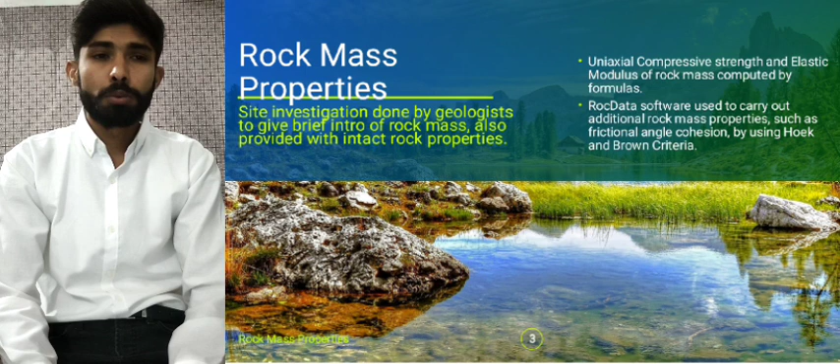which used the Hoek and Brown criterion to carry out additional parameters that are required for open pit mines, and hydrogeological consideration, rock support system, reinforcement, and most importantly the design of the pit wall and monitoring system. We selected the most suitable methods to classify our rock mass, that is rock quality designation and rock mass rating.

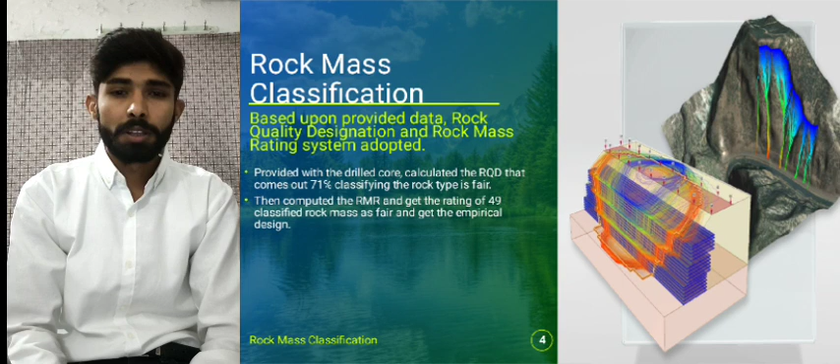We computed the RQD from the given core log, that is 71%, and the rock mass falls in the fair criteria. We also computed the RMR based upon the given information. Rock mass rating is 49, fair rock, falling in the third class, and we get the empirical design as suggested by the RMR table: excavation method, stand-up time and support system. Surface mine design.

The process of planning and designing the layout of infrastructure of an open pit mine is referred to as surface mine design. The basic aim of designing a surface mine is to maximize the ore recovery with minimum per ton cost of the ore body. This includes designing of an open pit, haul roads, surface plants, mineral processing plants, dump area, water storage, offices, etc.

So first of all, we have to decide our pit limits, that is totally based upon rock mechanics. The pit limit should be vertically and laterally decided. The general criterion to decide the pit limit of an open pit mine is based upon the economic factor, that is called the economic block value for a block that we have to mine.

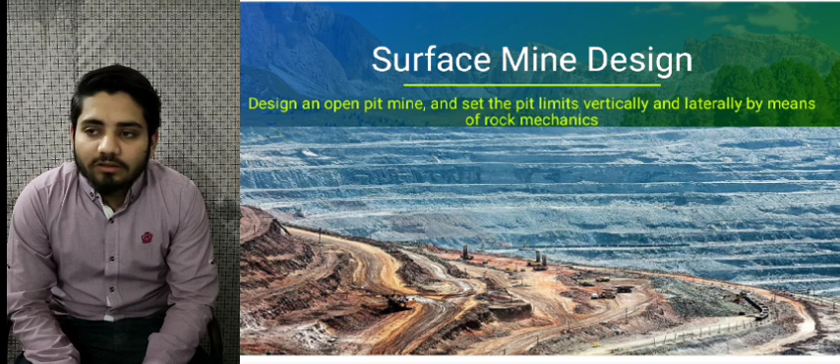As we were not given the economic block values for our blocks, nor the block size, we are not in a position to calculate the TBVs and CBVs of the blocks. So we have not decided our pit limit based upon the economic factor. We decided the pit limits based upon rock mechanics factors. For that, we searched literature formulas and decided to first calculate the stripping ratio of the ore body.

For the stripping ratio, we calculated the volume of the ore body and the volume of the overburden, and our stripping ratio became 0.34. Then, using the stripping ratio, the ore body thickness and the overburden thickness, we get the vertical limit of our open pit mine. For the lateral limit, we have to compute the slope angle, which we computed by the simplified Bishop's method, and our slope angle is 56 degrees.

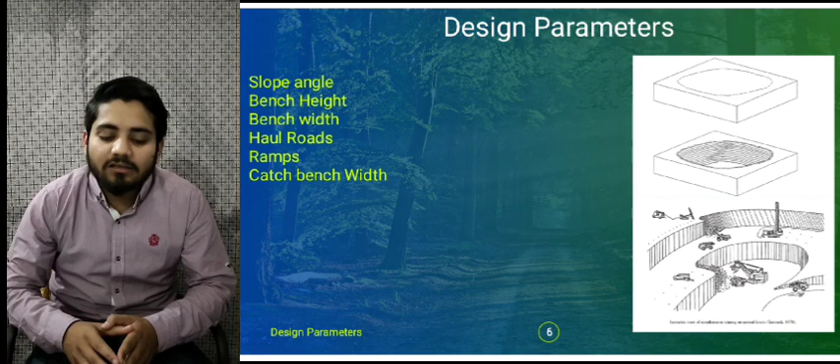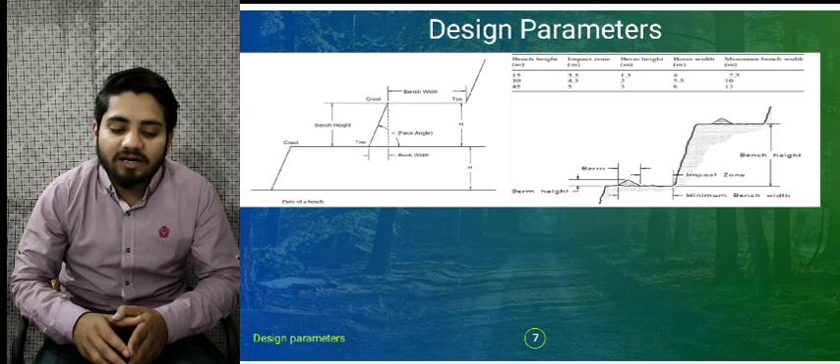In this slide, we are given the parts of the bench that are mostly used in the design of a bench. The bench comprises the bench angle, bench height, berm width, and catch bench width. And if we look at the table, it shows the typical values for bench height, bench width and catch bench width.

Further, we were asked to run a ground control assessment for finding the problematic areas, recommendations, and the selection of the location of the ramp. For running the ground control assessment, we were given the joint set data.

We put all the data in the Dips software and plotted the equatorial plot and contour plot of the stereonet. The stereonet shows us that the failure to be suspected is wedge failure. So we have to provide proper reinforcement and a proper support system to the benches, so that no wedge failure

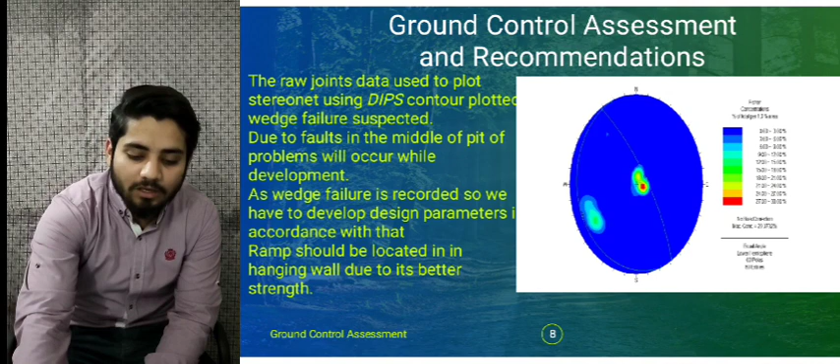occurs. As well, we have a fault dipping at 63 degrees in the middle of our pit, so we also have to provide a proper support system there so that no hazard is created. The location of the ramp is in the hanging wall, as the hanging wall has good compressive and tensile strength. Further, we have to design the underground mine.

The underground mining method is selected by the Nicholas weighted method, as taught by our Dr. Yasir Majid, and we selected the underground mining method based upon rating. Our mining method came out as the cut and fill stoping method. In this picture we see the pictorial representation of the cut and fill mining method.

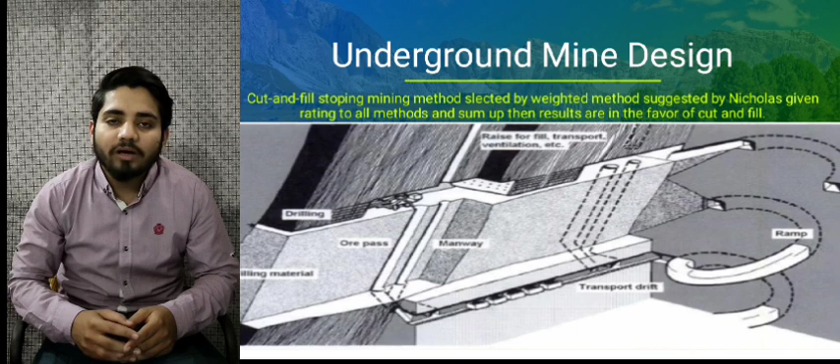The design parameters of the cut and fill mining method: it comprises a ramp. We decided on a 7% grade for our ramp with a 5 meter height and 5 meter width. We also required to design service entries. Service entries include ventilation shafts and other drifts and shafts required for the facilities underground.

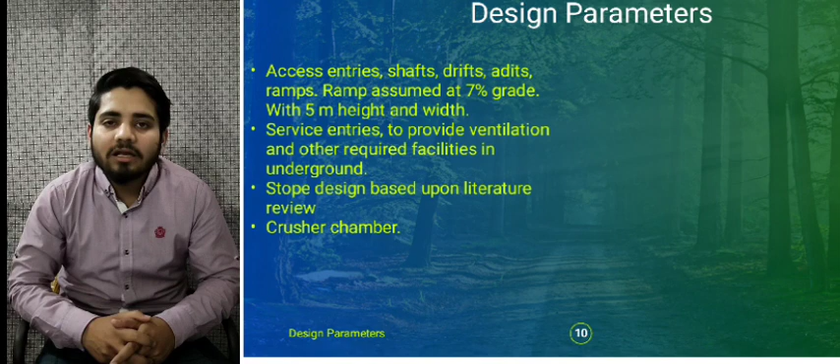We also required to design the stope. Complete data for the stope design was not provided to us, so we took the formula from literature and designed the stope and crusher chamber dimensions. We also decided the backfill material based upon our ore body: cemented as well as hydraulic fill.

Next we ran a ground control assessment. We used the Kirsch equation to find the radial, tangential and shear stresses around the boundary. We also computed the in situ stresses, that is, vertical and horizontal stresses.

After computing these stresses, we also computed the hoop stress and the factor of safety, which is 1.49 for the ground control of the mine. After the ground control assessment, we found the problematic areas and provided proper support in those areas.

Here is a short video on the cut and fill method. Hope you will enjoy this video.

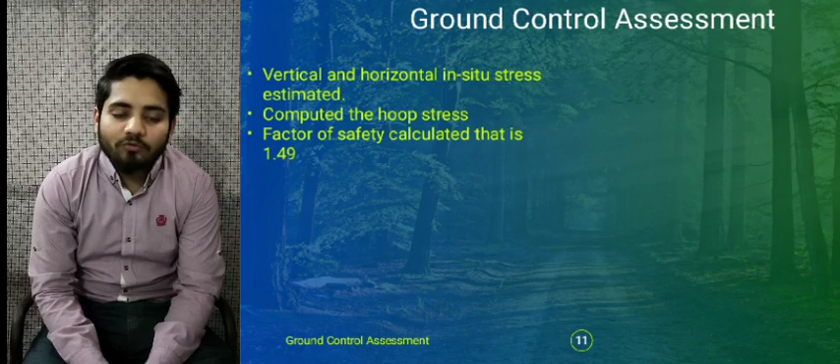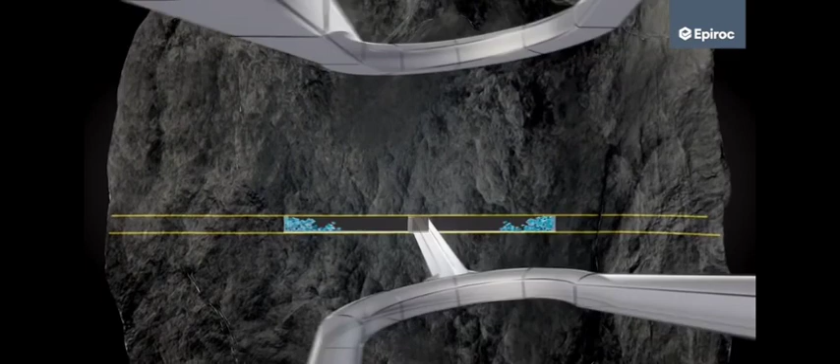Thank you. Cut and fill mining is a favored choice for steeply dipping and sometimes irregular ore bodies, and preferred by mines that require the capability of selective mining and adaptability to variations in the rock mass. It is generally referred to as a small-scale mining method. Mining is carried out in horizontal slices along the ore body, where the bottom slice is mined first. The excavated area is then backfilled and production continues upwards. Each production level is accomplished by drifting until the entire slice has been mined. The slice is...

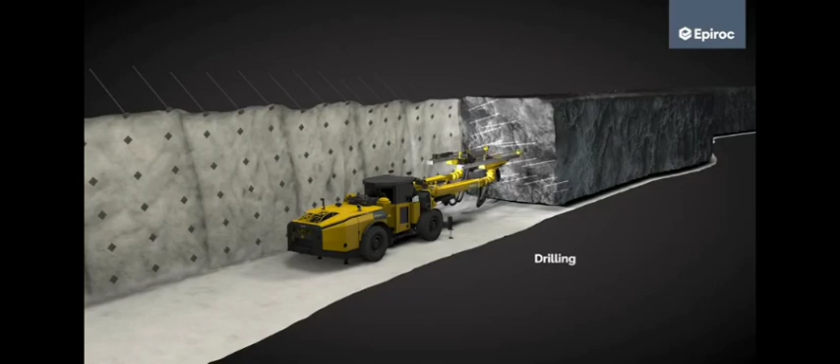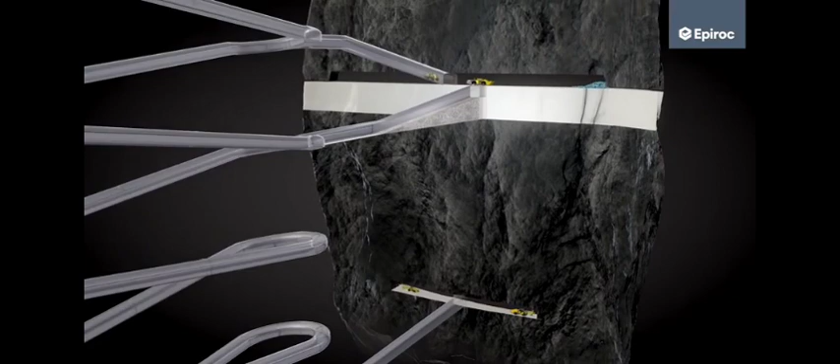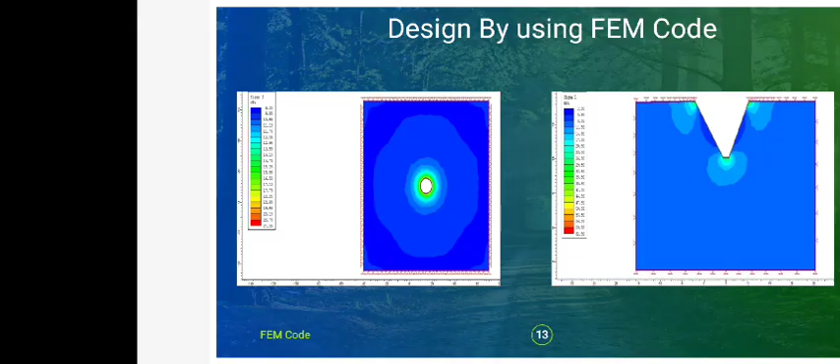We were requested to design our open pit mine entries and underground mine entries. As we are not experts in designing these entries in Phase2, by common sense we designed the ramp as well as the open pit mine, as seen in this slide. I'm also not satisfied with this design, but we have tried our best.

Ground control strategies aim to minimize the risk of ground instability and rockfall hazards in mining operations. These include geological mapping, a ground support system, monitoring, back analysis, geotechnical risk assessment, and training and education of the laborers. So what are the anticipated problems?

As we know, the Reko Diq mine is in a region considered a backward area of Pakistan, Balochistan. So we have to provide a proper transportation system, communication system, and electricity, which is needed in mining operations and for the machinery operated in mines. Also, the equipment used in surface and underground mining operations is not available, so we have to import all the equipment needed for development and production of the ore and the gold.